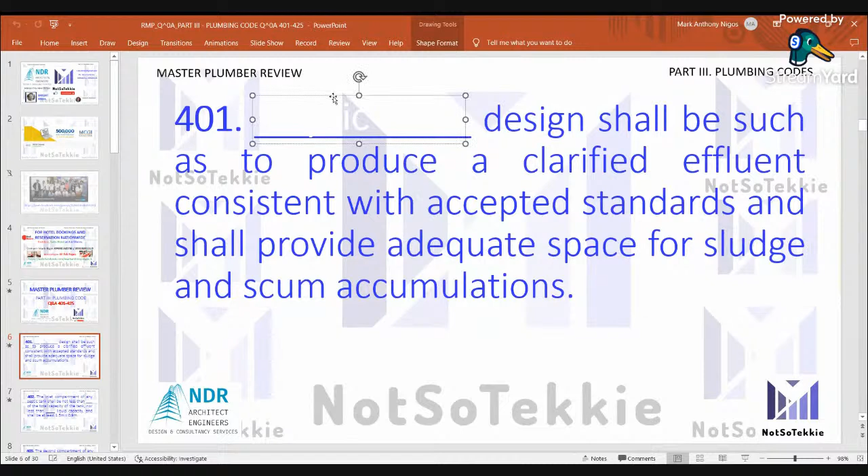401 to 425. 401. Septic tank design shall be such as to produce a clarified effluent consistent with standards and shall provide adequate space for sludge, scum, and accumulation. The answer is septic tank.

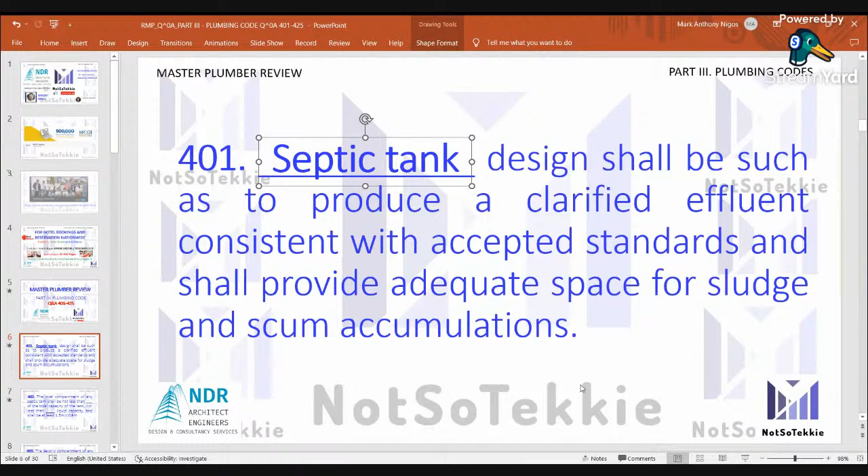402. The inlet compartment of any septic tank shall be not less than 2/3 of the total capacity of the tank, nor less than 2 cubic meter liquid capacity, and shall be at least 1.5 by 0.9 meter.

403. Second compartment of any septic tank shall have a minimum capacity of 1 cubic meter and a maximum capacity of 1/3 of the total capacity of such tank.

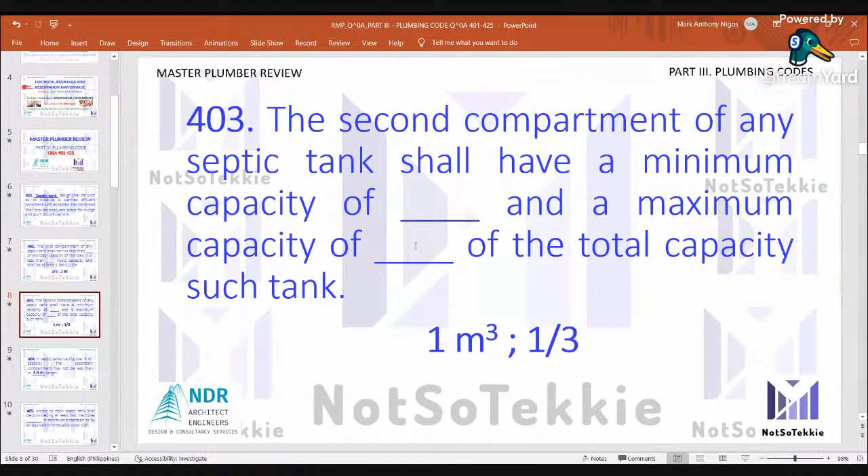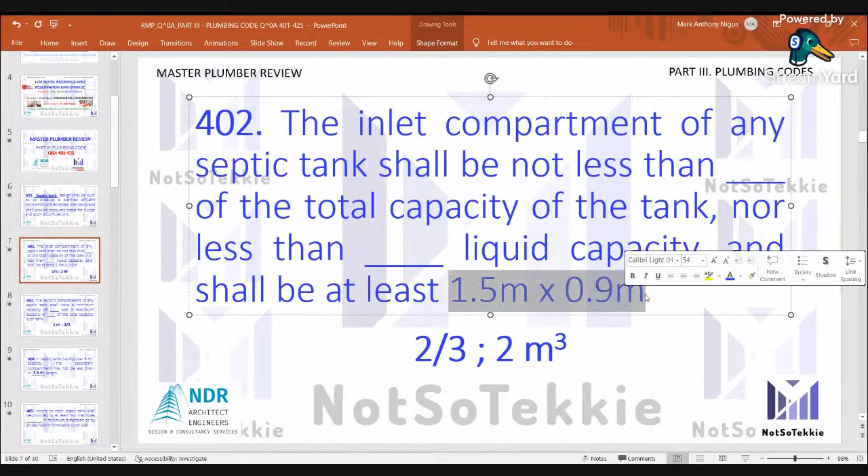404. Septic tank having over 6 cubic meter capacity, the second compartment may not be less than 1.5 meter in length. Kasi yan, pagka secondary compartment, 1/3 siya ng total capacity ng tank. Pag first compartment, 2/3 sa capacity ng tank. Kasi ito yung dimension niya, 1.5 by 0.9 meter.

Tingin ko na lang. Septic tanks having over 6 cubic meter capacity, the secondary compartment may not be less than 1.5 meter in length. Answer is 1.5.

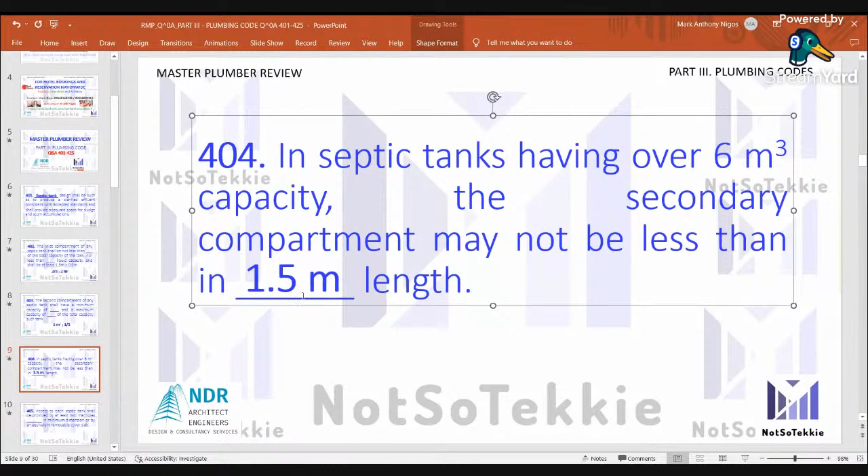405. Access to each septic tank shall be provided by at least 2 manholes, 508 millimeter in minimum dimension, or by equivalent removable cover slab.

Access to each septic tank shall be provided by at least 2 manholes, 508 millimeter in minimum dimension, or by an equivalent removable cover slab. The answer is 508.

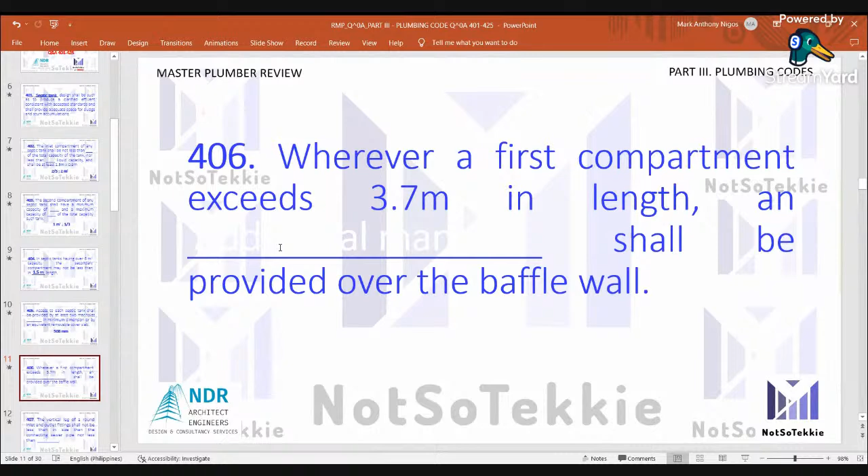Okay, 406, tuloy na tayo. Wherever a first compartment exceeds 3.7 meter in length, additional manhole shall be provided over the baffle wall. Answer is additional manhole.

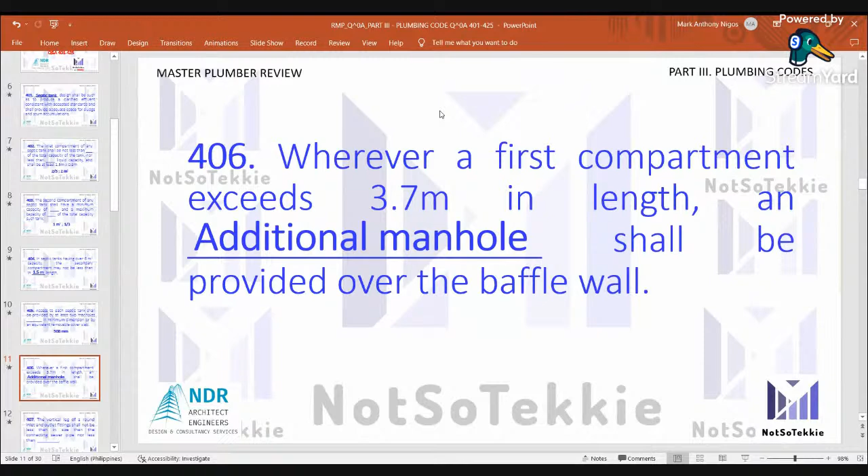407. Vertical leg of a round inlet and outlet fittings shall not be less in size than the connecting sewer pipe, nor less than 104.6 millimeter. Bakit ganito yung tanong? Double check ko lang. Answer is 104.6 millimeter.

The vertical leg of a round inlet and outlet fittings shall not be less than in size than the connecting sewer pipe, nor less than 104.6 millimeter. Tama naman.

Tama sa reviewer, no?

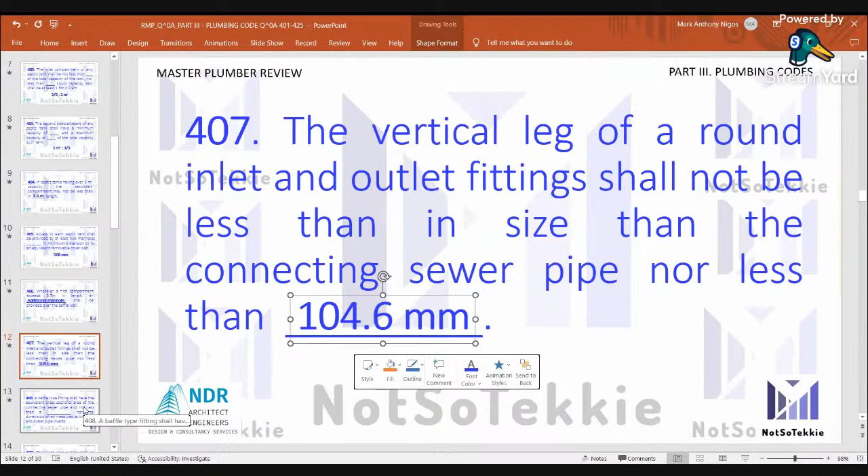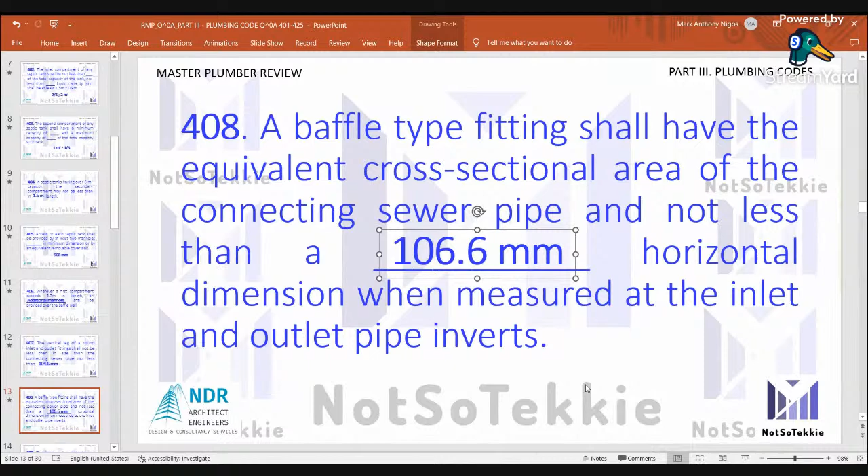409. The inlet and outlet pipe or baffle wall shall extend blank and above at least blank below the water surface. The answer is 101.6 and 304.8.

Inlet and outlet pipe or baffle shall. Bakit yun? Sorry, text ko na.

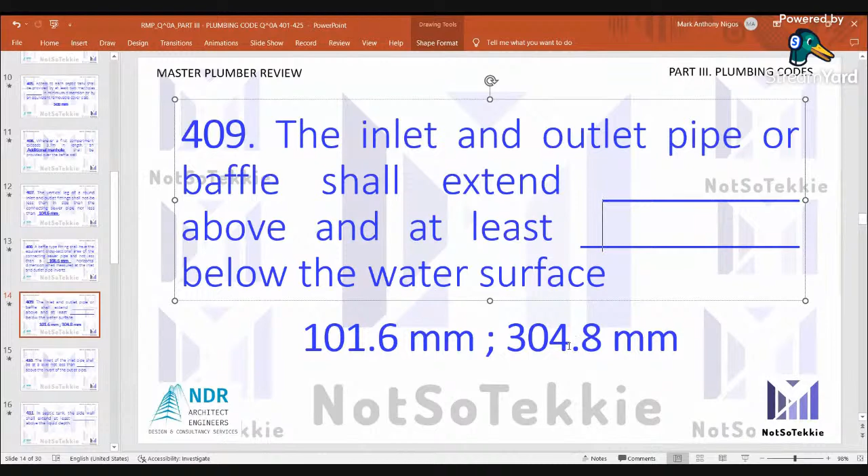Tama. The inlet and outlet pipe or baffle shall extend 101.6 above and at least 304.8 below the water surface.

410. The invert of the inlet pipe shall be at a level not less than blank above the invert of the outlet pipe. The answer is 50.8 mm. The invert of the inlet pipe shall be at least not less than 50.8 mm above the invert of the outlet pipe.

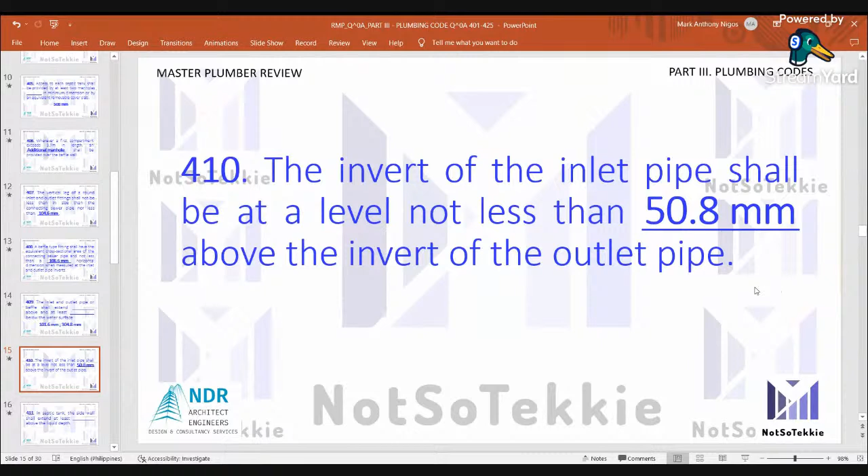411. In septic tank, the side wall shall extend at least blank above the liquid depth. The answer is 228.6 mm.

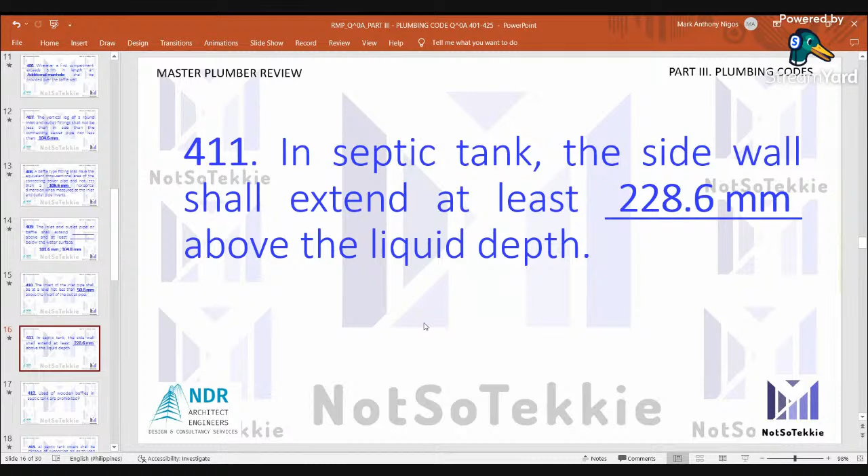411. Ulitin natin. Septic tank, the side wall shall extend at least 228.6 mm above the liquid depth.

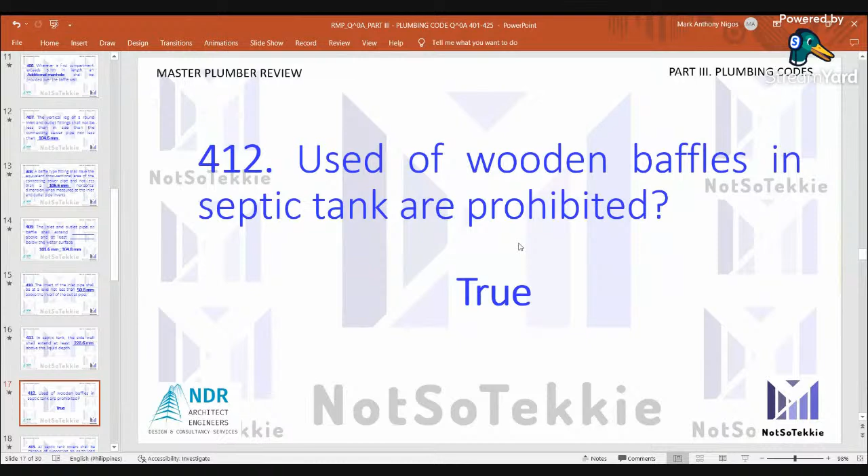412. Use of wooden baffles in septic tanks are prohibited. The answer is yes, true.

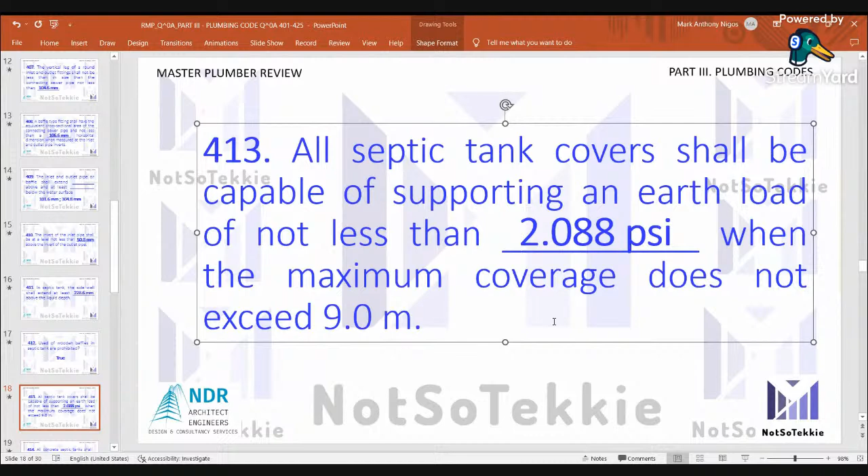All septic tank covers shall be capable of supporting an earth load of not less than 2.088 PSI when the maximum coverage does not exceed 9.0 meter.

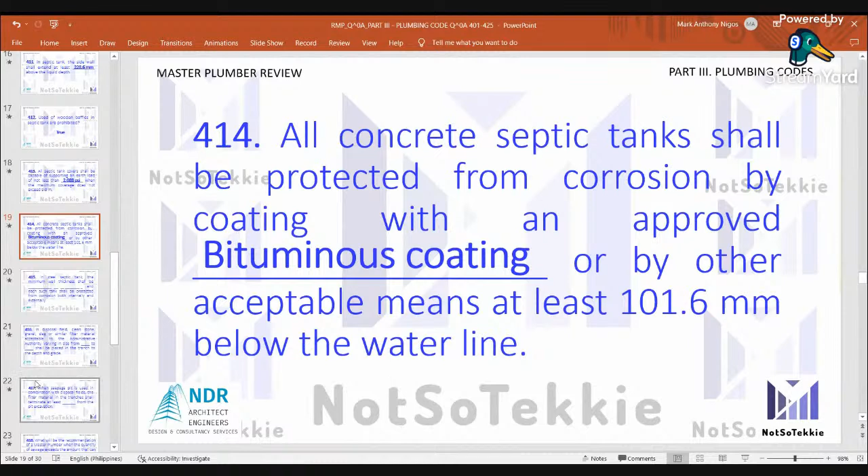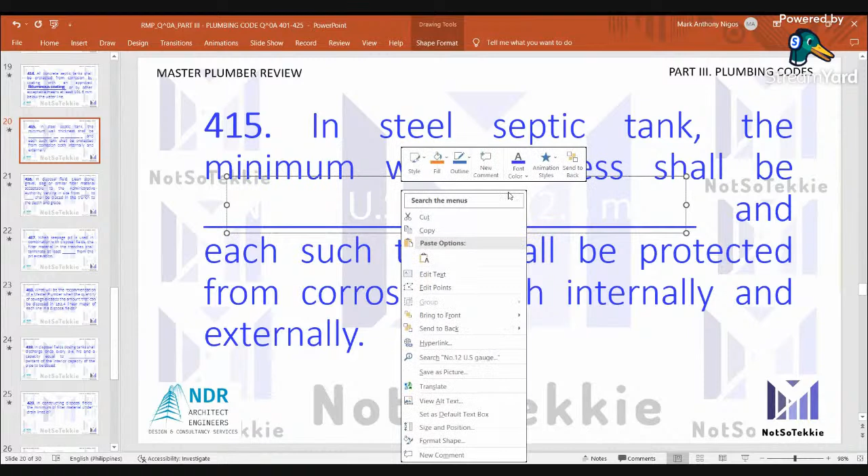For 415, in a steel septic tank, the minimum wall thickness shall be blank, and each such tank shall be protected from corrosion both internally and externally. The answer is number 12 US gauge or 2.8 mm thickness.

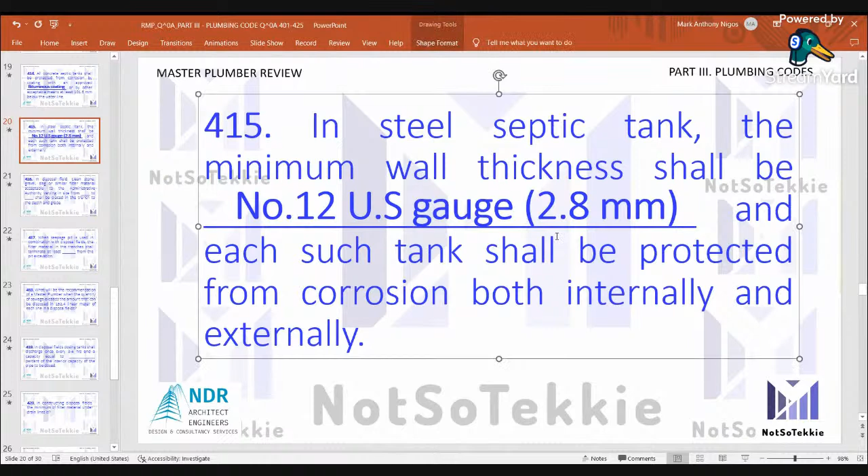In steel septic tank, the minimum wall thickness shall be number 12 US gauge or 2.8 mm, and each such tank shall be protected from corrosion both internally and externally.

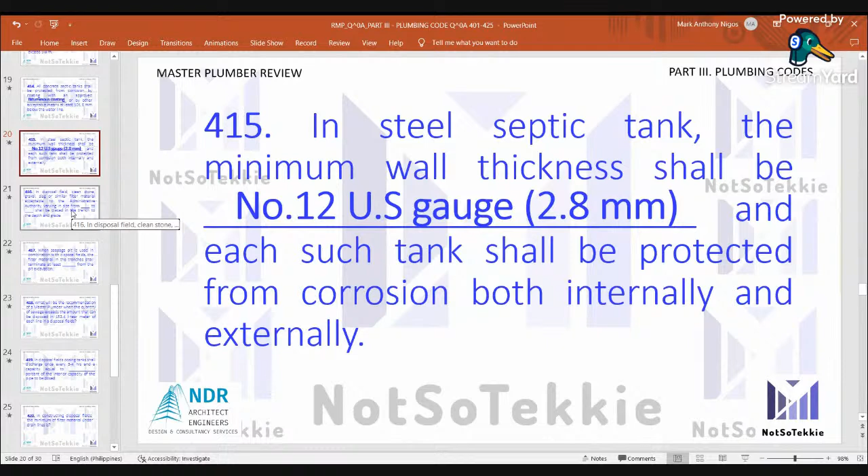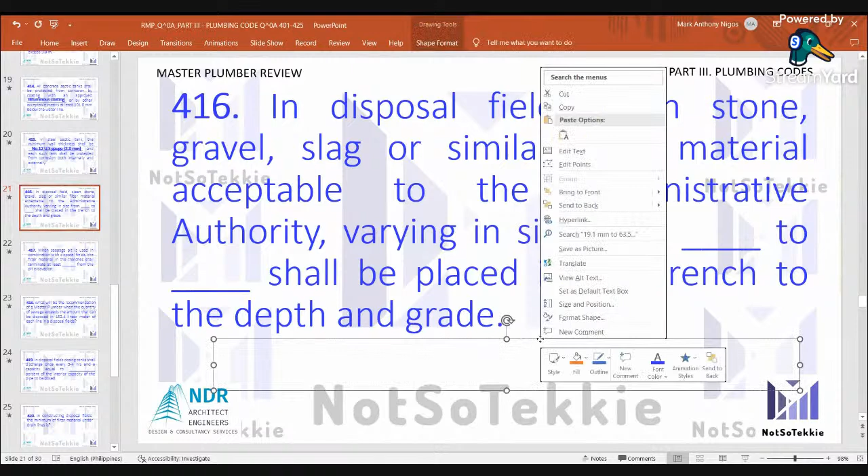For 416, disposal field, clean stone, gravel, slag, or similar filter material acceptable to the administrative authority varying in size from blank to blank shall be placed in the trench to the depth and grade. The answer is 19.1 mm to 63.5 mm.

Ulitin ko, then sabihin ko na yung sagot. Disposal field, clean stone, gravel, or slag or similar filter material acceptable to the administrative authority varying in size from 19.1 mm to 63.5 mm shall be placed in the trench to the depth and grade. The answer is 19.1 to 63.5 mm.

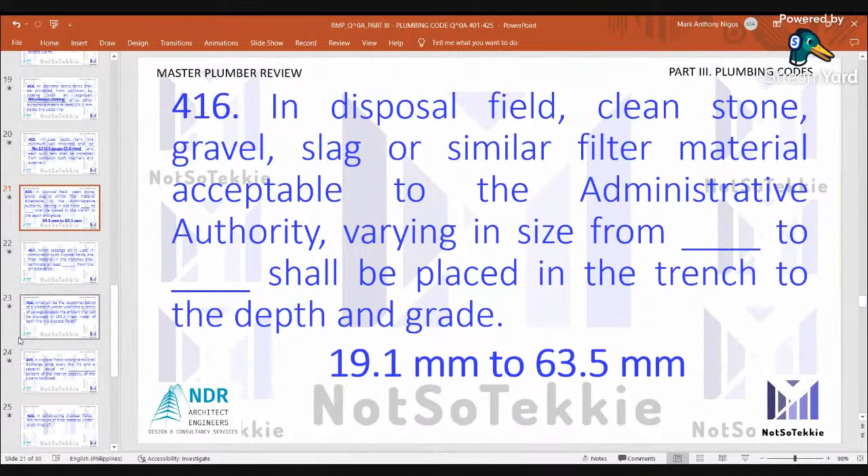Teka lang, maya. When seepage pit is used in combination with disposal fields, the filter material in the trenches shall terminate at least blank from the pit excavation. The answer is 1.5 m. When seepage pit is used in combination with disposal fields, the filter material in the trench shall terminate at least 1.5 m from the pit excavation.

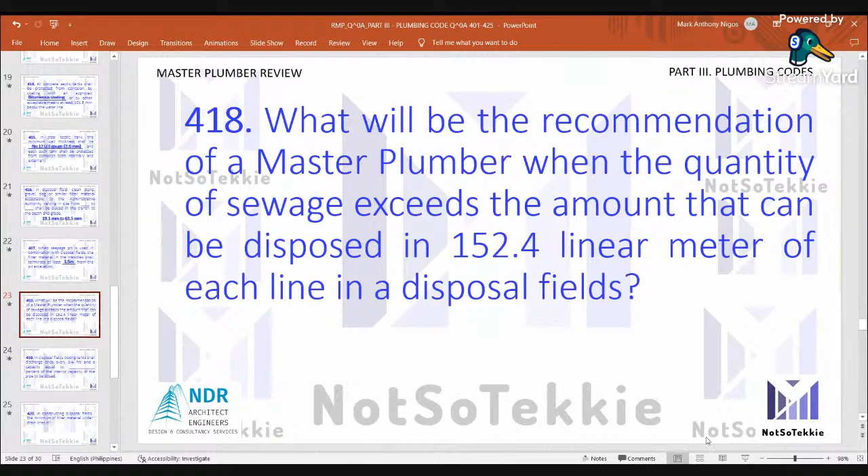The answer is use a dosing tank. What will be the recommendation of a master plumber when the quantity of sewage exceeds the amount that can be disposed in 152.4 linear meter of each line in a disposal field? The answer is use of dosing tank.

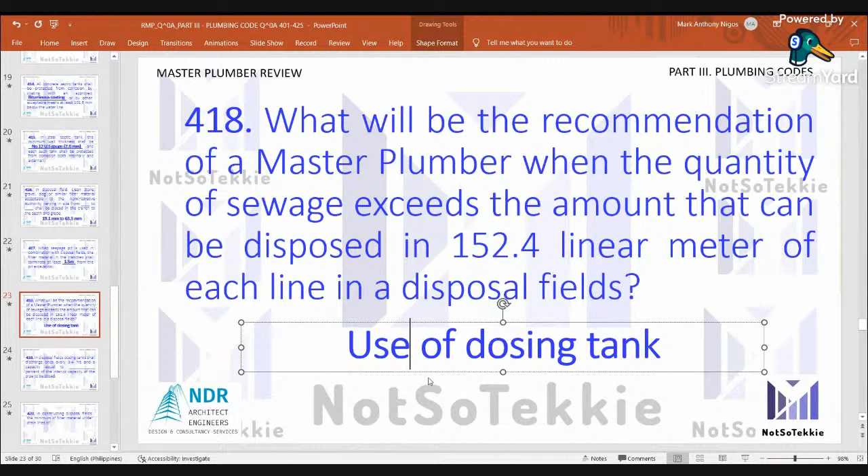Sino to? Shout out kay Ipin the Bird. Ano na lang, minimal fee po, minimal fee, para naman makompensate yung pagod natin. Sorry po, ngayon ko lang napansin. Message nyo na lang po ako sa ano. Opo, yun lang po. Shout out Ipin the Bird.

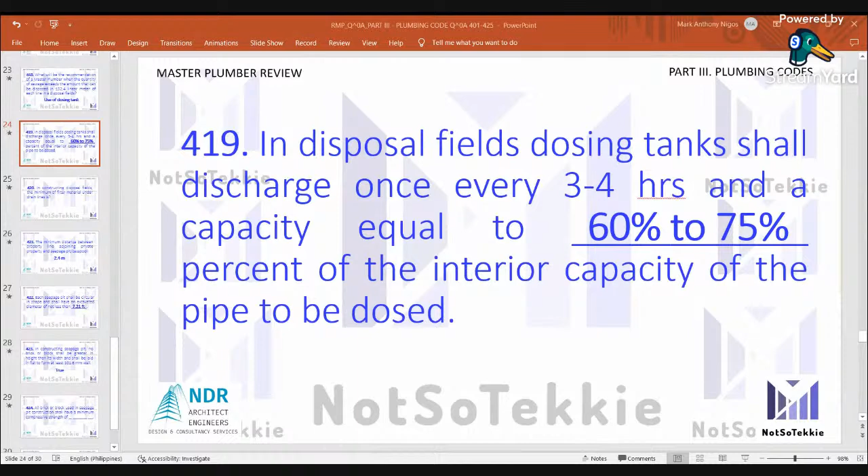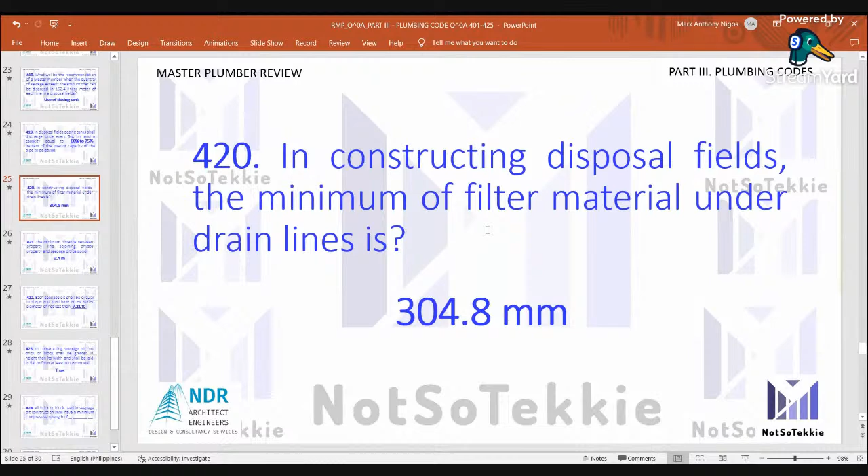420. Constructing disposal fields, the minimum of filter material under drain lines is blank. The answer is 304.8 mm. Constructing disposal fields, the minimum filter material under drain lines is 304.8 mm.

I suggest panoorin mo na lang yung lahat ng video previews. Yung mga magre-review, panoorin nyo na lang yung mga previous videos. Makakatulong naman yun. May mga nakapasa, nagpasalamat sila, last exam nakapasa sila. Nakatulong yung pagre-review na to. Maraming lumabas sa review, no?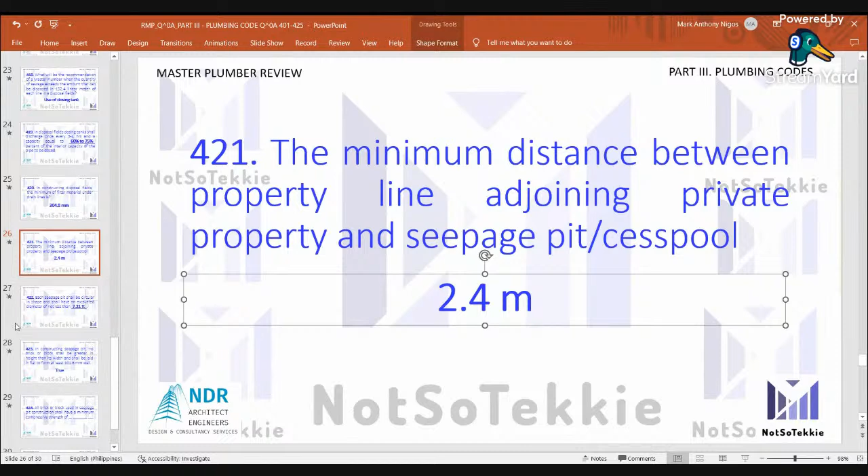Each seepage pit, hindi ko natago, sorry. Each seepage pit shall be circular in shape and shall have an excavated diameter of not less than 7.21 feet. Laki ganun siya, pabilog. Okay, 422.

Each seepage pit shall be circular in shape and shall have an excavated diameter of not less than 7.21 feet. Options: 3.28, 3.58, 6.56 - more than 2 meters ng diameter.

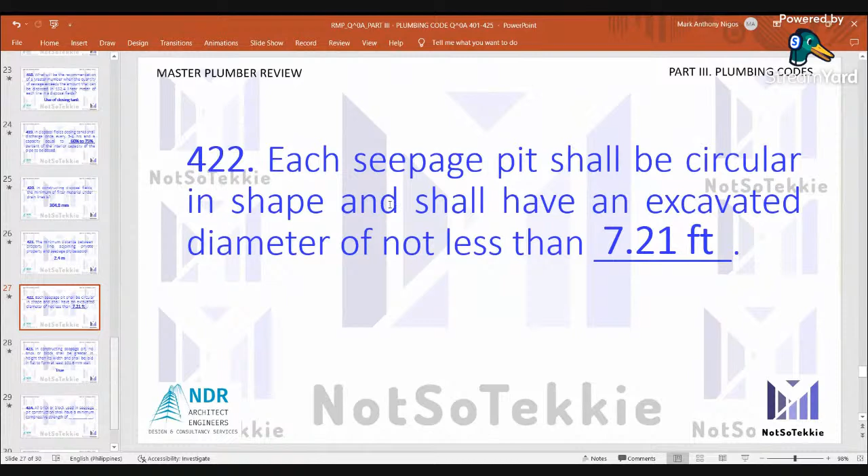423. In constructing seepage pit, no brick or block shall be greater in height than its width and shall be laid flat to form at least 101.6 mm wall. The answer is true.

Constructing seepage pit, no brick or block shall be greater in height than its width, and shall be laid flat to form at least 101.6 mm wall. The answer is true.

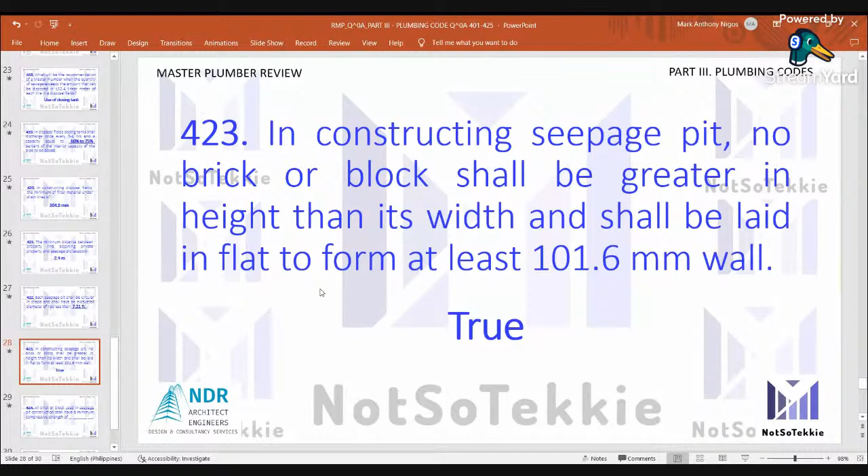424. All brick or block used in seepage pit construction shall have a minimum compressive strength of blank. The answer is 2,497.62 psi.

All brick or block used in seepage pit construction shall have a minimum compressive strength of 2,497.62 psi.